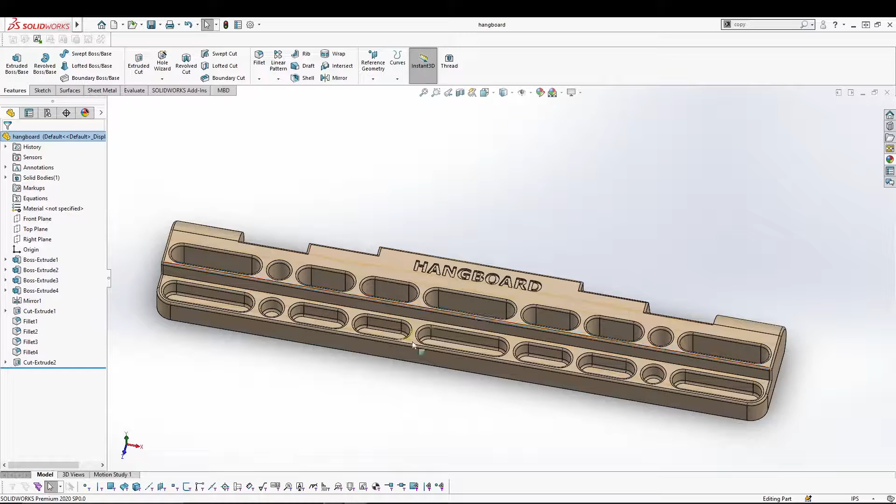To all of you who don't know what a hangboard is, this is a kind of workout tool, also known as a fingerboard, so you can do strength training using this board. It's basically mounted on a wall, and then you can hold onto these slots and hang yourself. That's where the name came from, hangboard, and it's basically used for strength training.

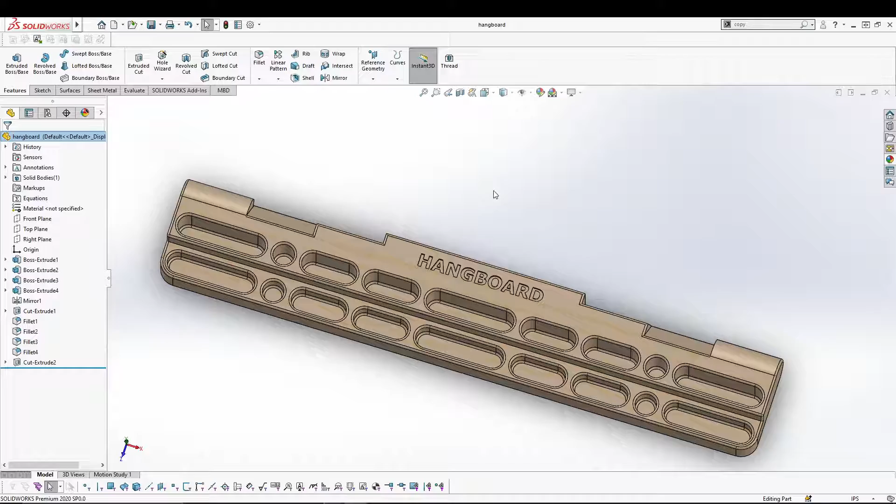Right, so let's see how we can quickly design this one inside SOLIDWORKS. Let's close this for now, I'll go for a new part, and I'll change the document units to IPS from the bottom right corner. Then let's start with the very first sketch on the right plane.

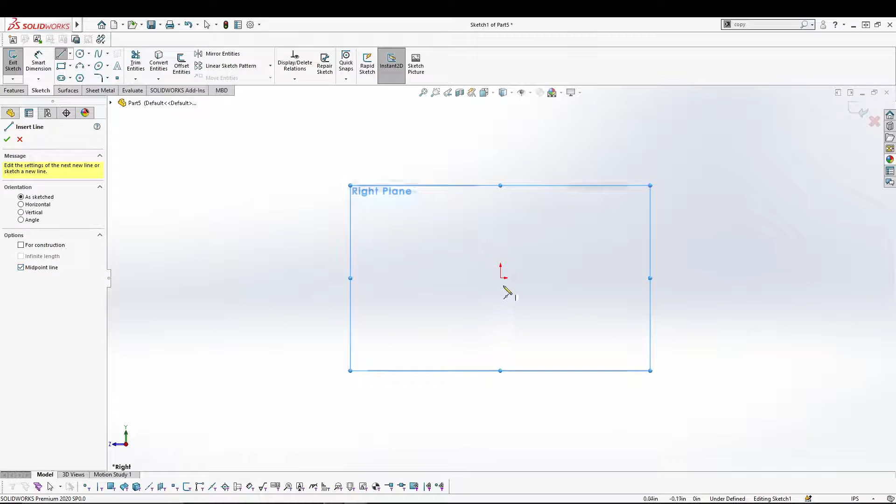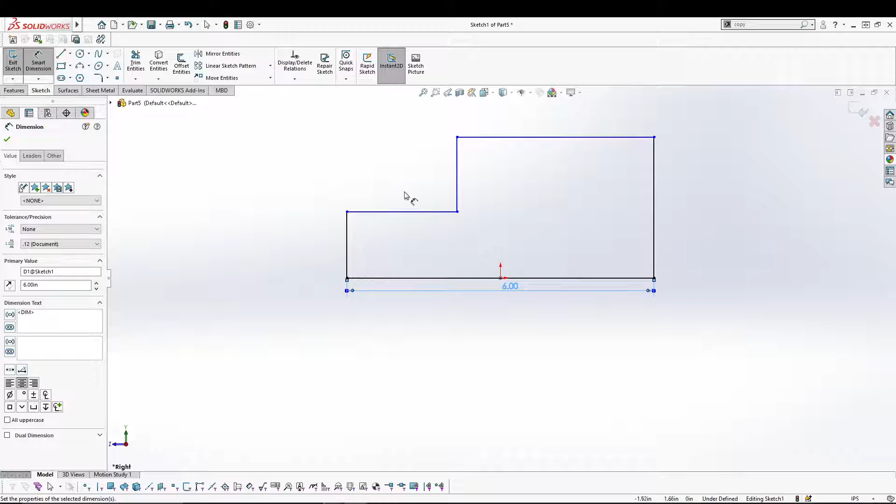Let's go for dimension: 6 inches from here to here, 1 inch. This could be 2.5, and also from here 4 inches.

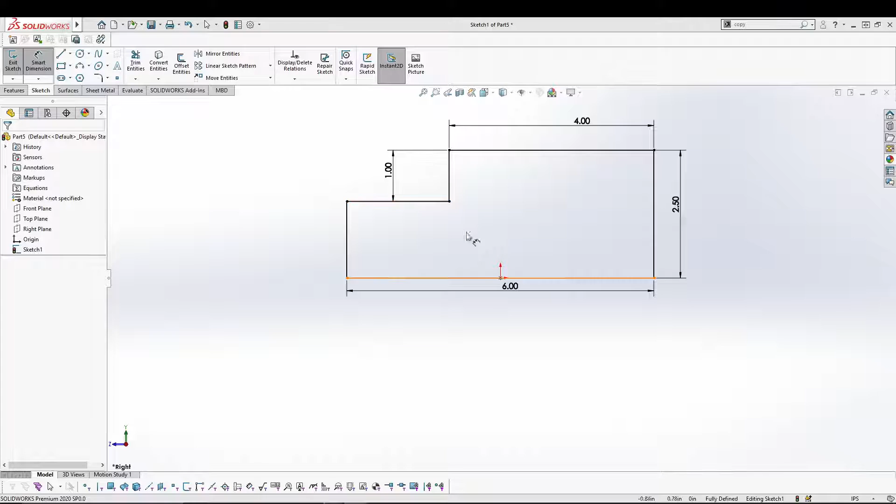Okay, once you have your sketch fully defined, the sketch will turn black. Let's exit the sketch and go for extrude boss base. Here, let's go for mid plane with 12 inches.

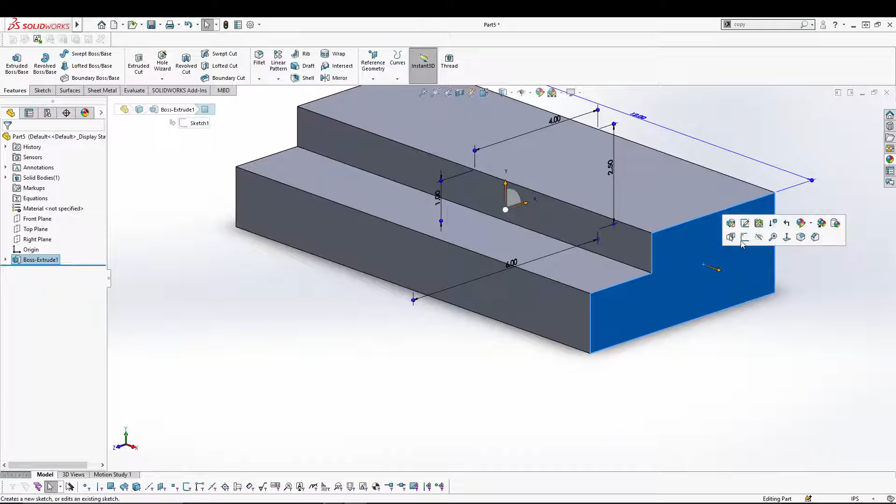We'll do another sketch. To do that, I'll select this face and go for sketch. I will select the face and convert the entities so that we have all these outlines. Then let's do a line point, then give it a dimensional constraint between these two, angle constraint 55 degrees. Then let's trim these two.

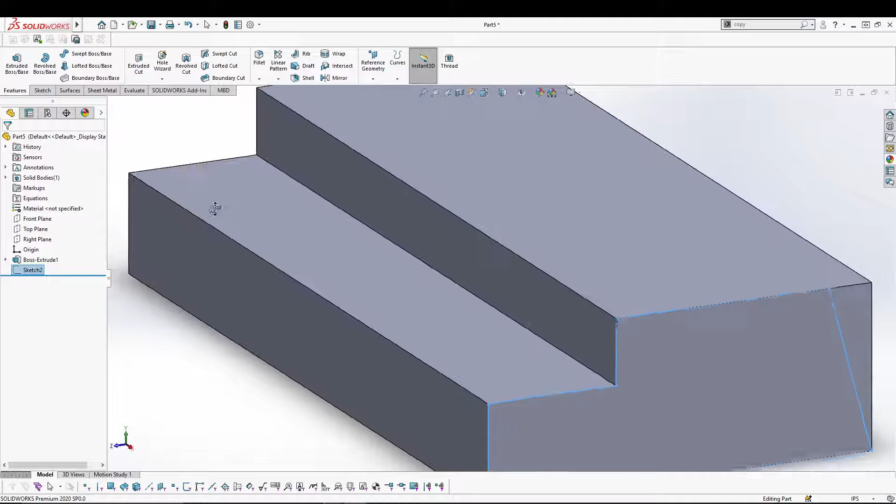After that, you can exit the sketch, and let's go for extrude boss base again. Change the depth to 4 inches. Yeah.

After that, I'm gonna do another sketch. Let's select this face, sketch, convert entities, the line to this page with a dimensional constraint between these two, 60 degrees. Then do a trim off. Exit the sketch and again go for extrude boss base, 4 inches, that's fine.

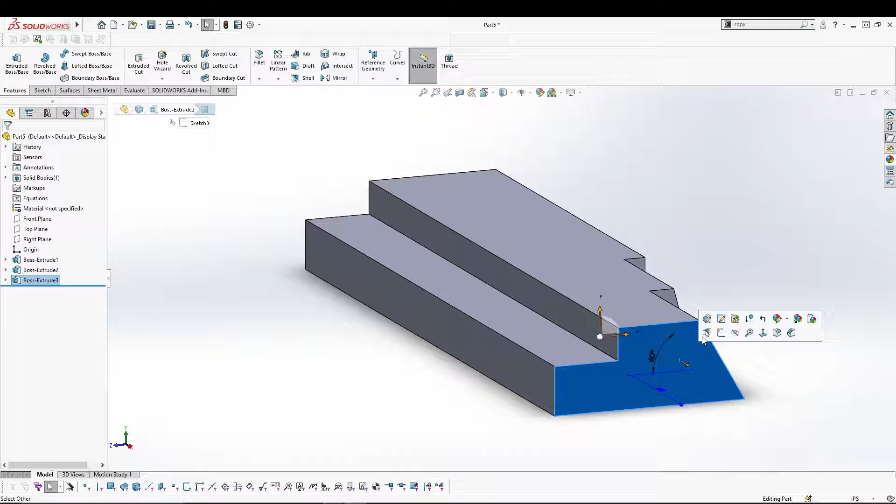Let's do our last sketch, and let's select this face, sketch, convert entities, and here I'm gonna do a 3-point arc, arc like that. Okay, next I'm gonna do tangency between these two. We can say another tangency to which...

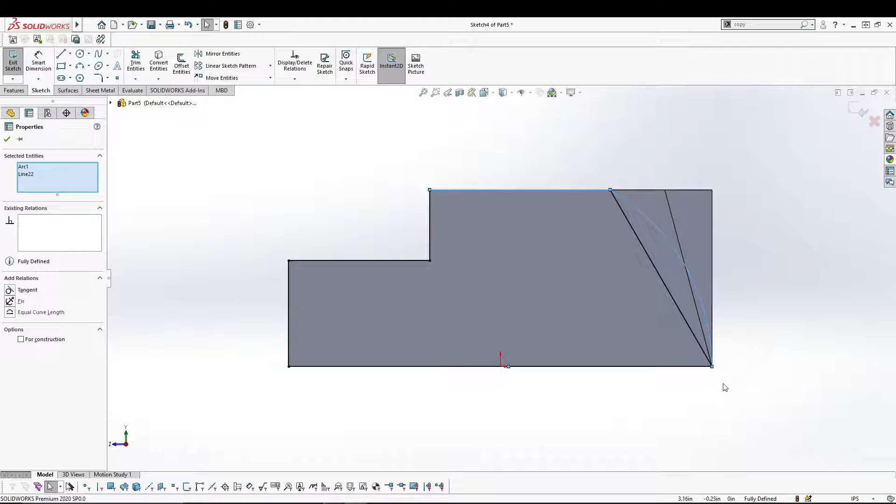else we can delete. We can show all the constraints, so let's delete the tangent relation and stick the... okay, let's delete the arc because I don't want this.

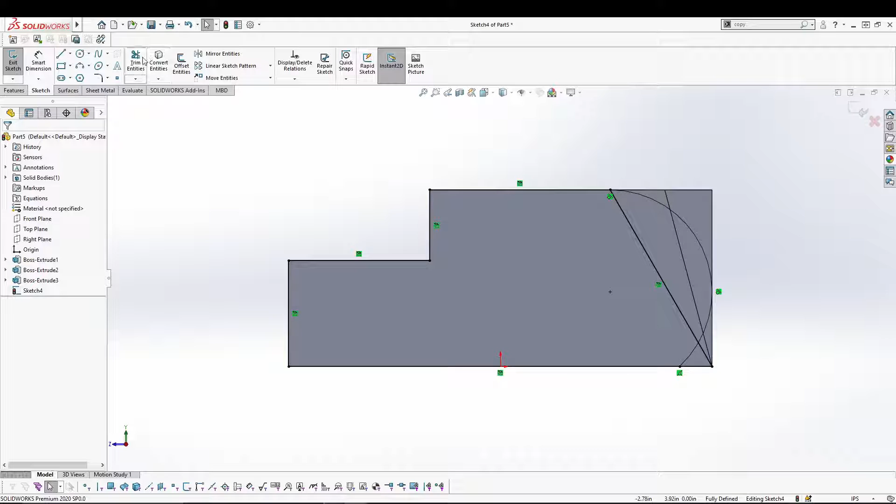So I'll do an arc from the end point to this edge like this. Now I can give tangency with 2. Then I can do another tangency from this edge. And then I can get rid of this one. Sketch, and have a profile which looks like this.

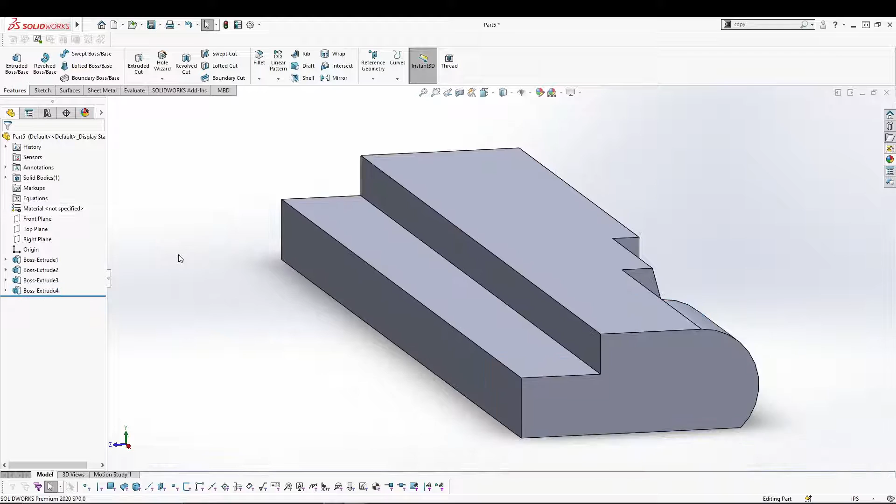Alright, so then go for extrude boss base. We have completed the half of our board.

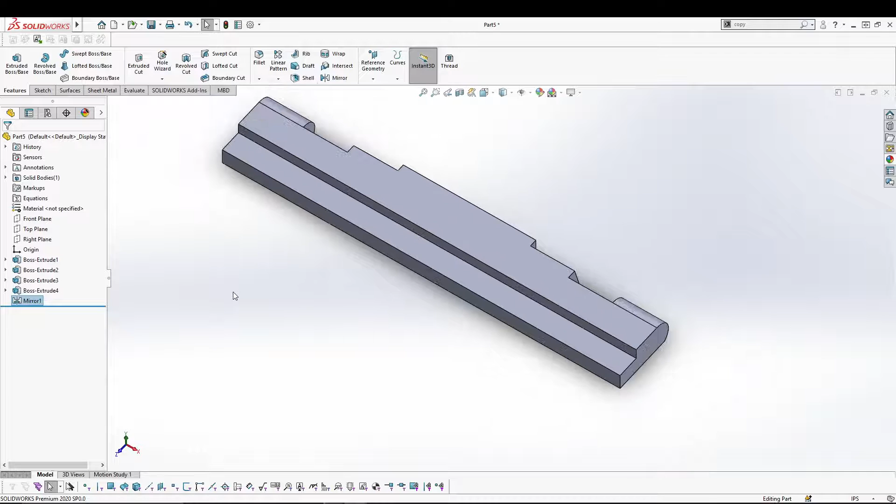Now we can do a mirror. So for the mirror command, the features to mirror, I can say 2 and 4. Then for face to mirror or plane, you can right click the board. I will do the slots for this one.

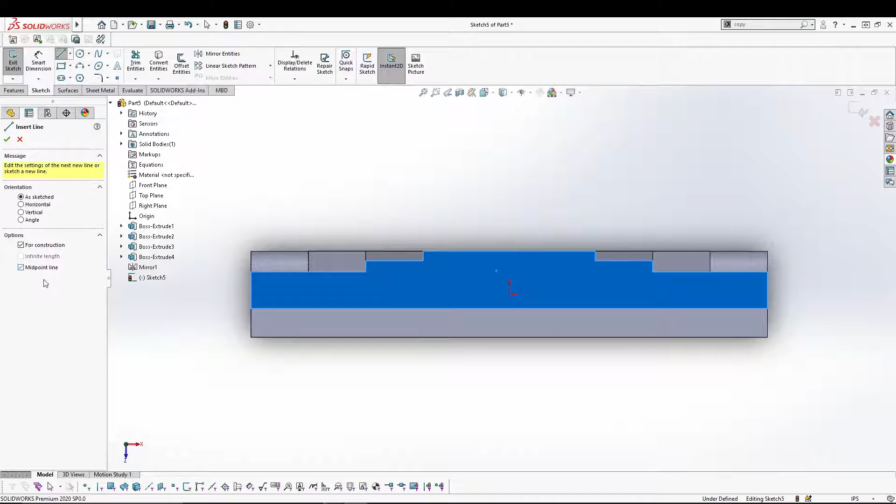So let's go for another sketch on this face. Let's start with some center lines. For midpoint line, I can do one from the origin, and another line I can do from this middle point, not that one, but let's go for center line, one line from the origin. Okay, last center line I can define from center to here.

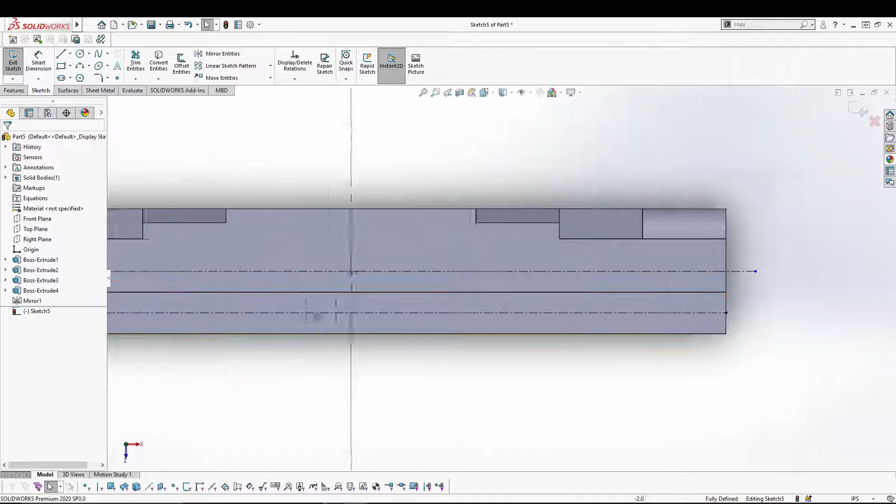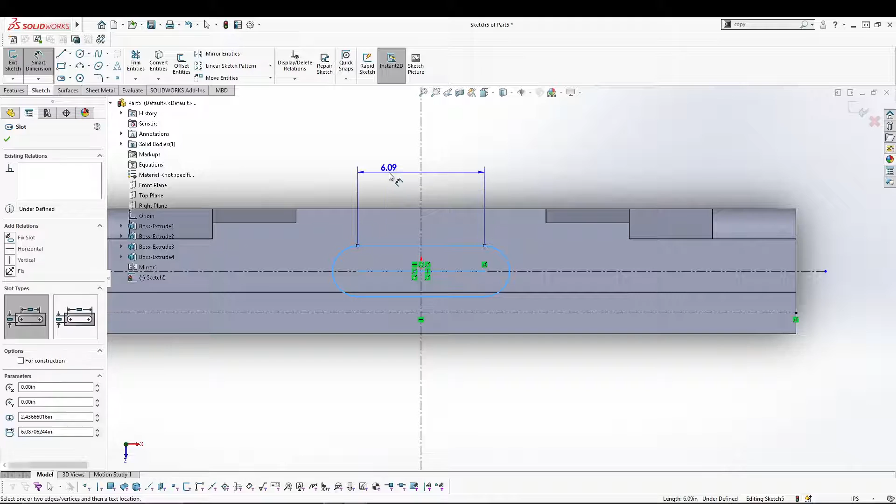Okay, now we have the center line, so let's do some basic sketches. Let's go for a center straight slot from this origin, then define dimension. So let's go dimension just from here.

Right, so we can do another slot. This one we can dimension equal to 1.5. Also a distance from this point to point could be right.

Let's do other line arc, and then select your previous arc, select this arc, them equal, then give smart dimension from this point to this point, 0.75.

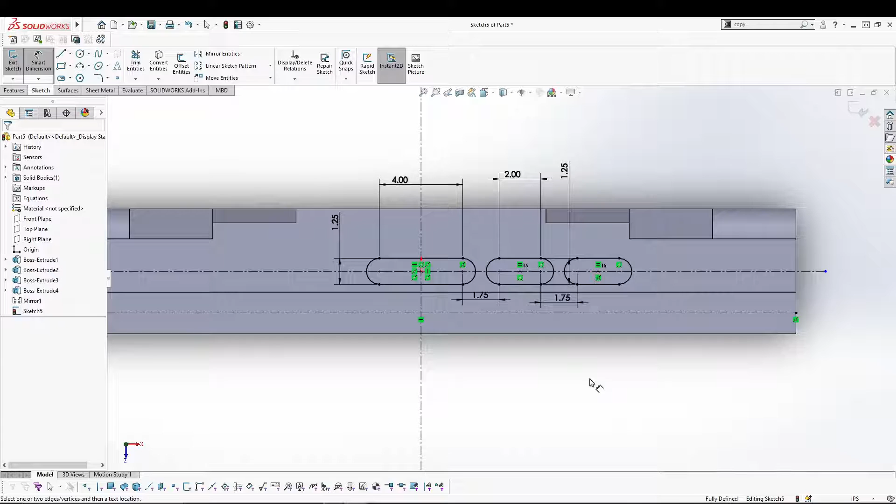Let's do a different profile this time. Let's go for a circle with a smart dimension, 1.25 diameter, 1.75 inches.

Let's do a last slot over here like this. Select the first arc and the last arc, them. If the final is smart dimension from the center of circle, this center of the arc, 1.75.

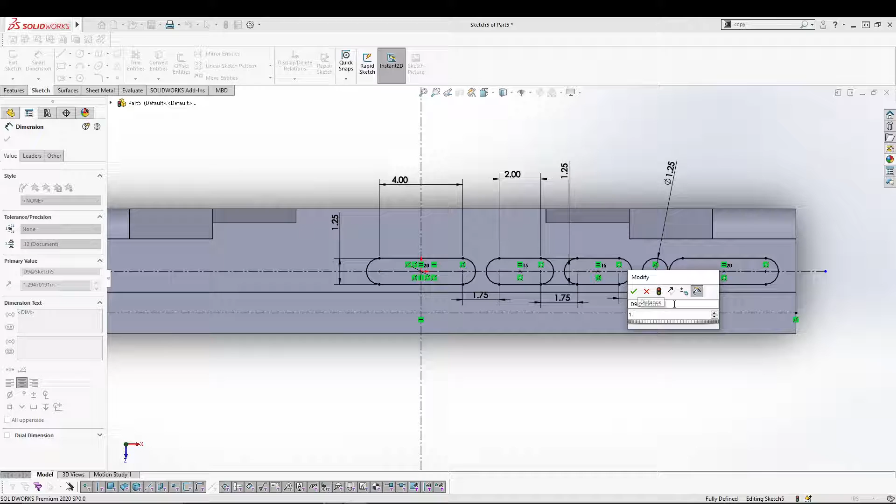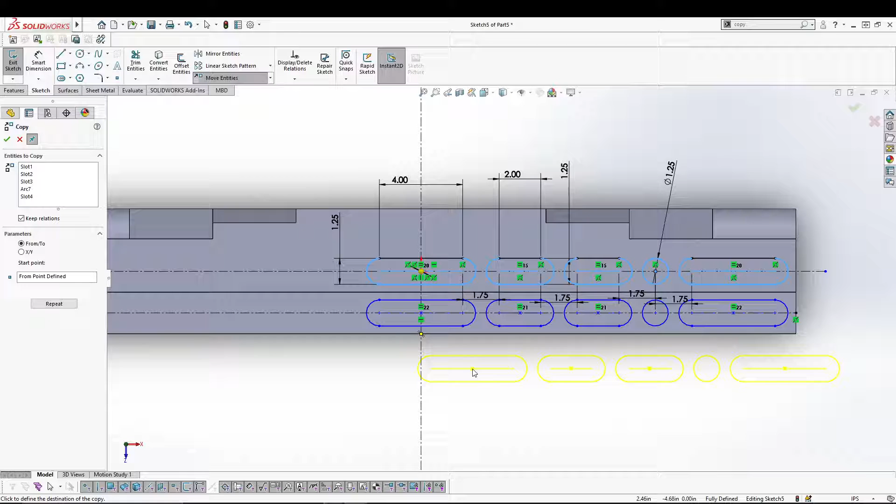What we can do is can utilize the copy command. So let's copy entities, dot circle, and let's go for starting as this one, and I'll paste on this point. It's the escape. You have the same dimension for the copied also.

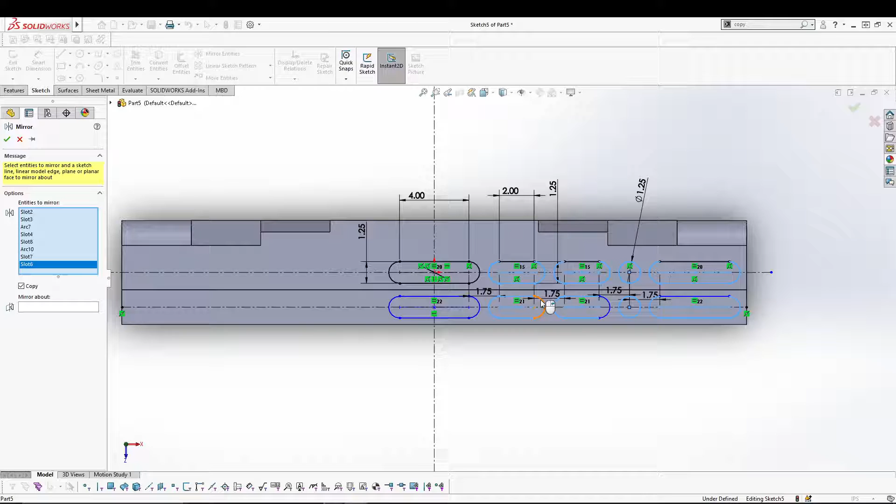And after that, I can do one thing. Can go for mirror entities, and I can select this slot, circle, this slot, this one, and we'll mirror it. Now we have all the slots for our hangboard.

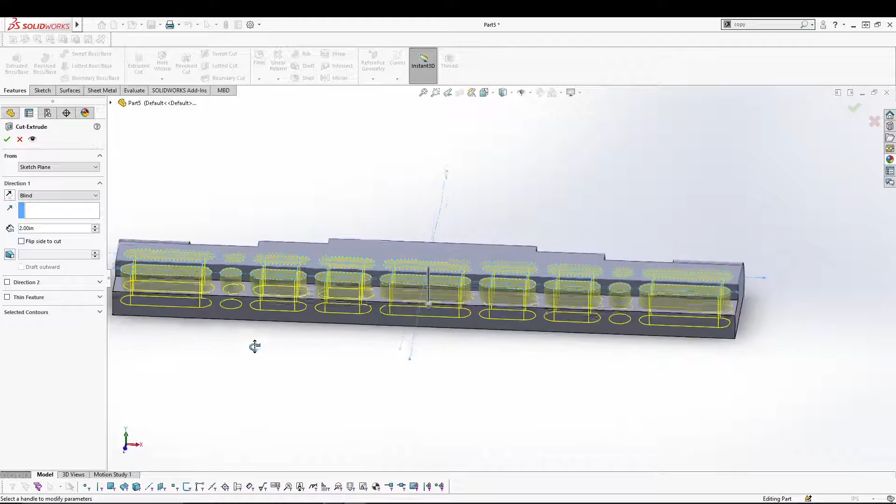Now we can do some fillet. Let's go for a fillet. I'll type in 0.125 inches radius, and let's select this edge and the side edge.

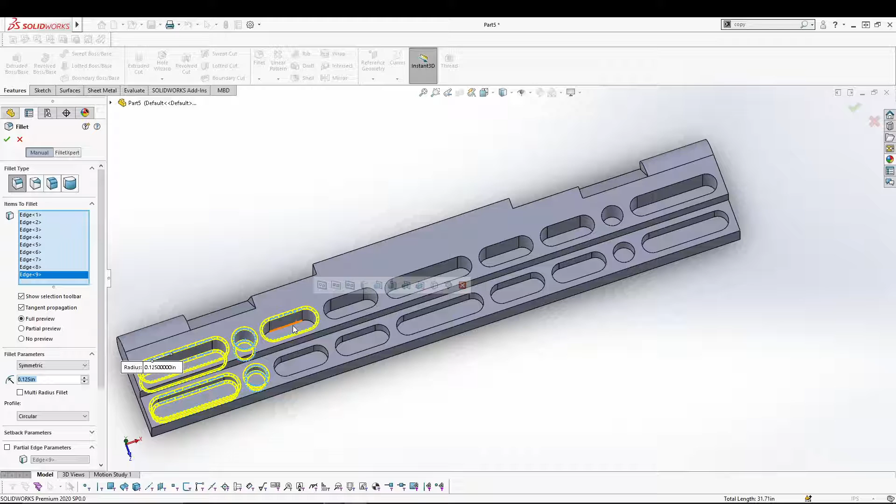Make sure you are selecting edges, because if you select face, then you get some error while doing. See, I've selected the face, so I can come and delete it. Only edge selection.

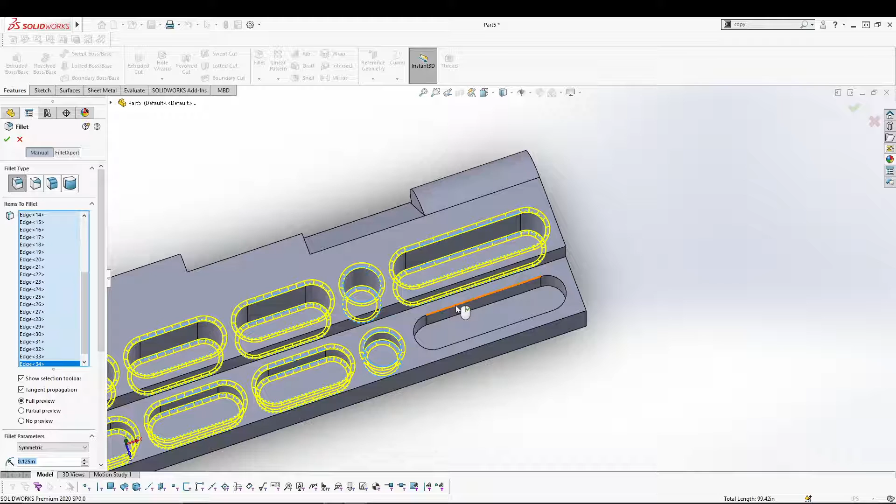So I've selected all the edges. I'll make sure that my radius is 0.125 and press the green tick. Get a nice fillet. So, slots.

After that, let's do. I want to make this corner and this corner a little bit curved. So let's go for another fillet.

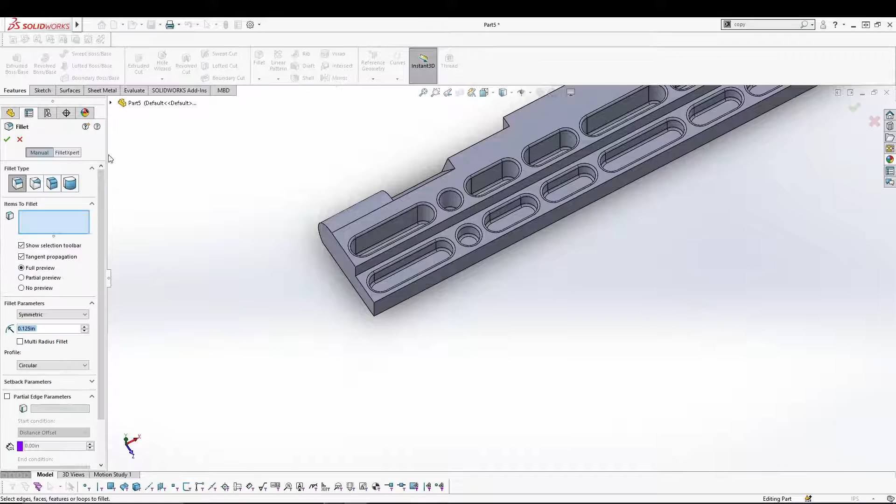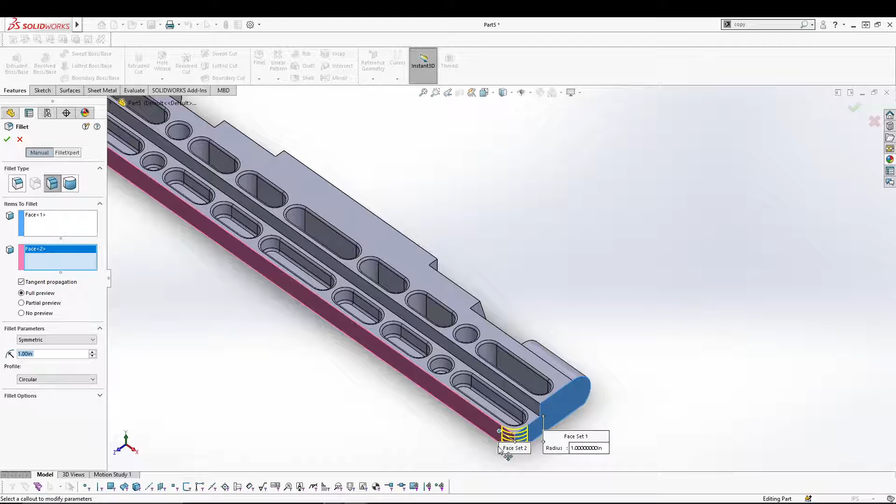Let's go for face fillet, face and face. Change the radius to 1 inches and press the green tick. A nice corner over here. We can repeat the same fillet on this face to give a nice round corner to that edge.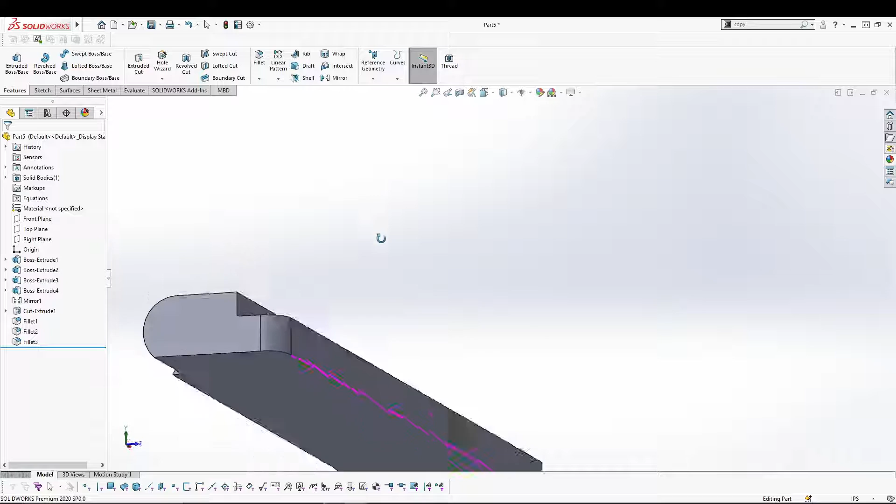After that, let's do more fillets. We'll keep the bottom flat, but in the top we'll do some fillet to all the sharp corners. Let's go for fillet, edge fillet, 0.125 inches as the radii. Let's select edge, edge, edge.

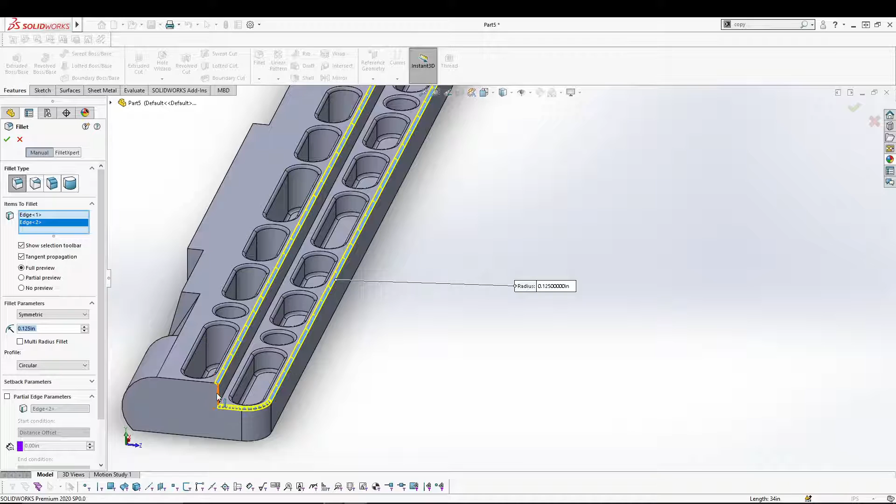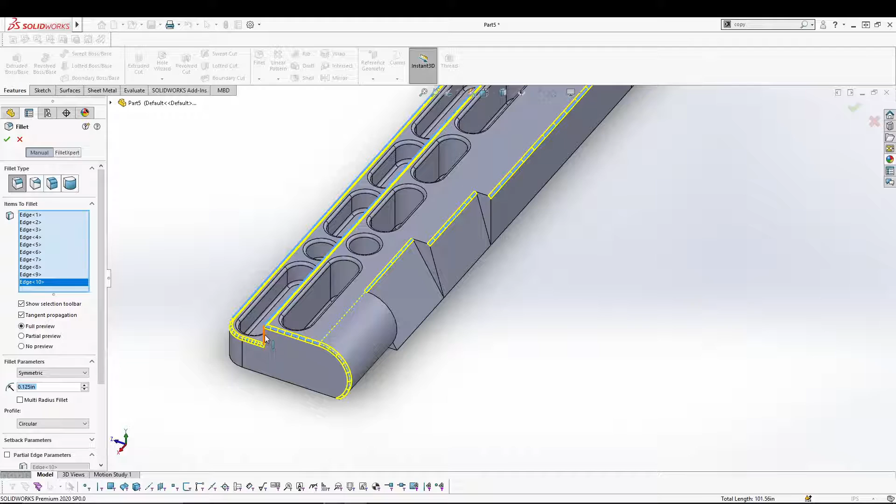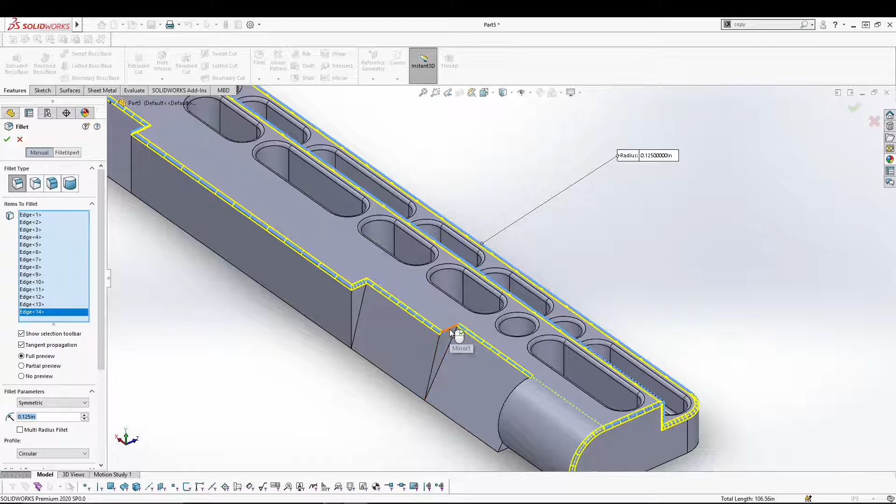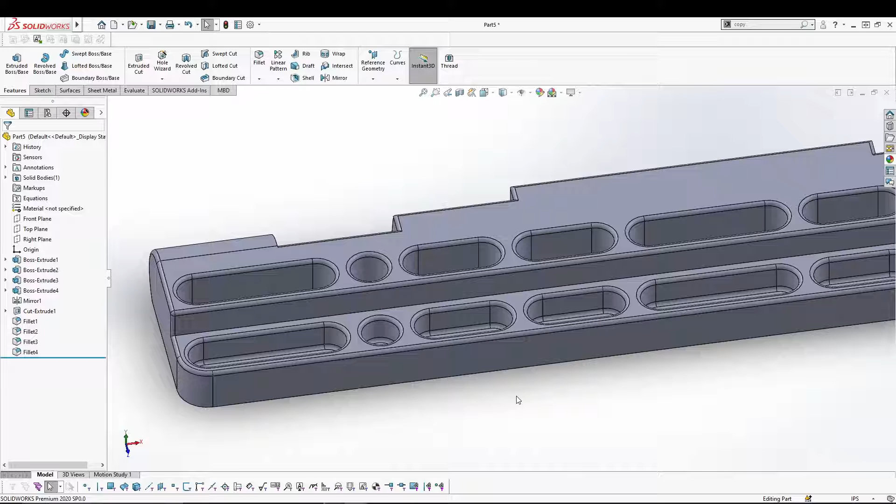Let's go. Let's do the edge. Press the green tick to have a nice fillet all over the front, you can say the top face of our hangboard. Keep the bottom flat because this will have some kind of mechanism so that it could be drilled onto the wall.

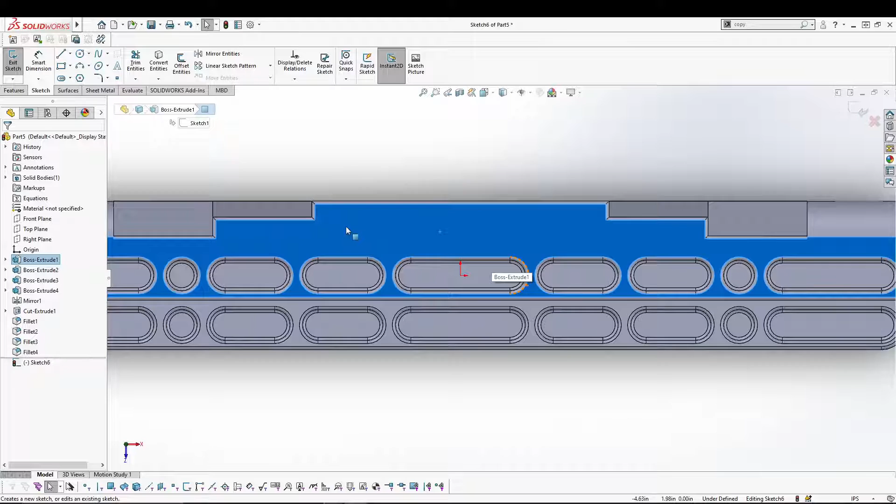And let's do a last thing that we will. Let's select this face, go for sketching. I will insert text for the hangboard. Let's start with a center line.

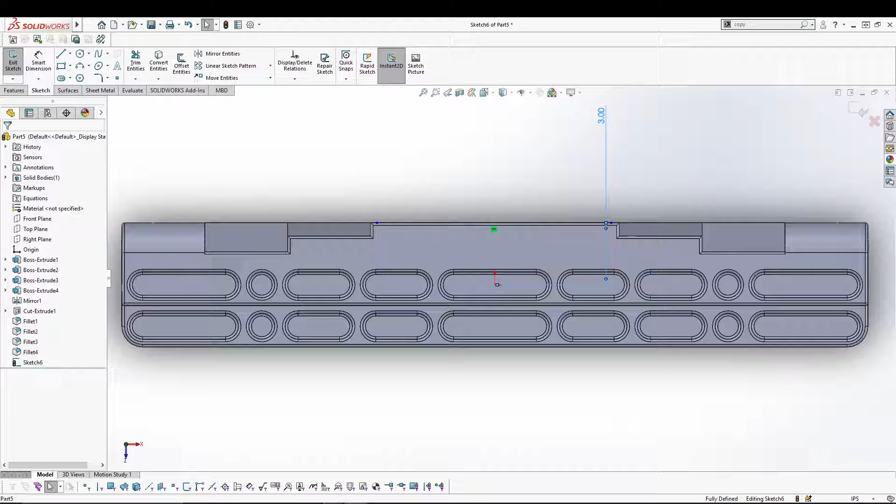Now we can utilize this curve to place our text. I'll select my curve as this. I'll type in board.

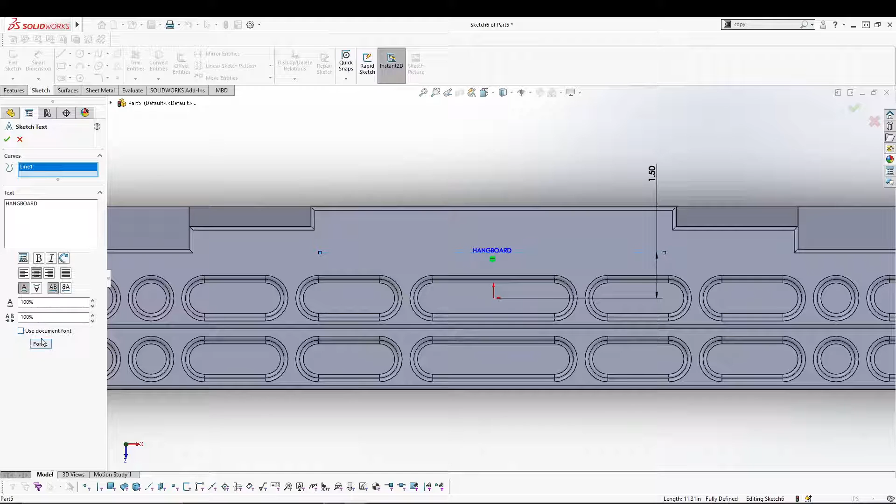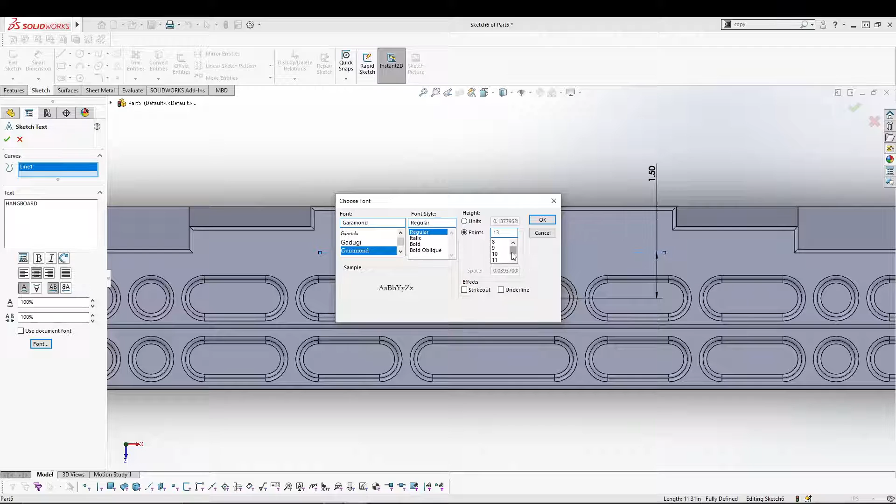Can do our own font, so let's go for what font. Garamond regular. Let's go for points, 48. Okay, if it looks too small, you can always go and change it to 58.

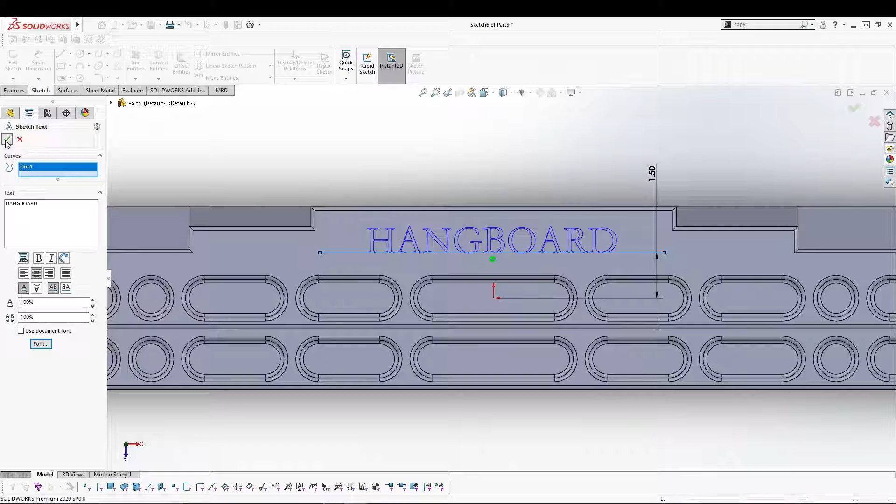Now we can finish the sketch and let's go for a cut, and change the depth to 5. The green tick.

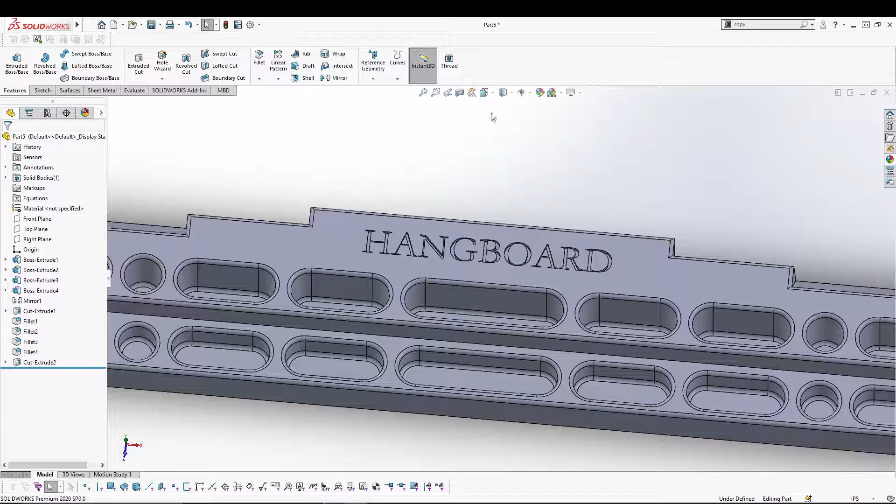Looks right. So that's how you can design a hangboard inside SolidWorks.